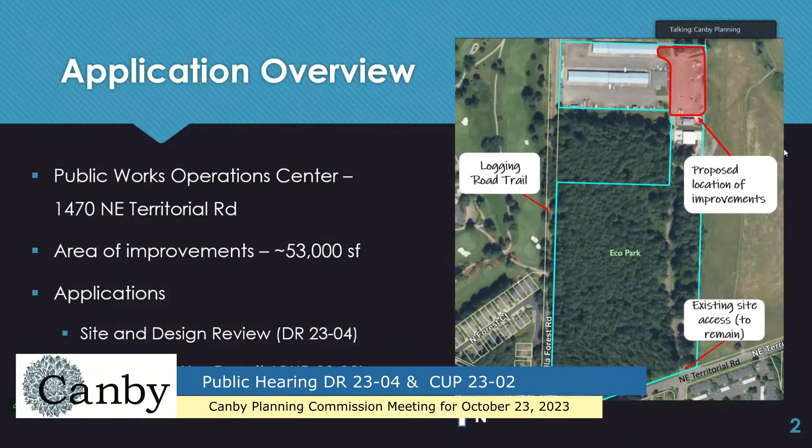So a brief overview of the site. The site is located at the existing Public Works Operations Center, which is located at 1470 Northeast Territorial. It is located directly north of the intersection of Territorial and Redwood, approximately 1,600 feet north of that intersection, so it's a fair ways north of the access to the site. It is a fairly large tax lot.

The tax lot also has Eco Park included in it, as you can see outlined here in blue on the map. The area of improvements are kind of covered by Judy's head at the moment, but up in the top right corner, sorry Judy, is a red area there, and it's basically just across the street from the Public Works office, if you have ever made it to the site. That area in red up there is the area of improvements that we're discussing for tonight, and that area is approximately 53,000 square feet.

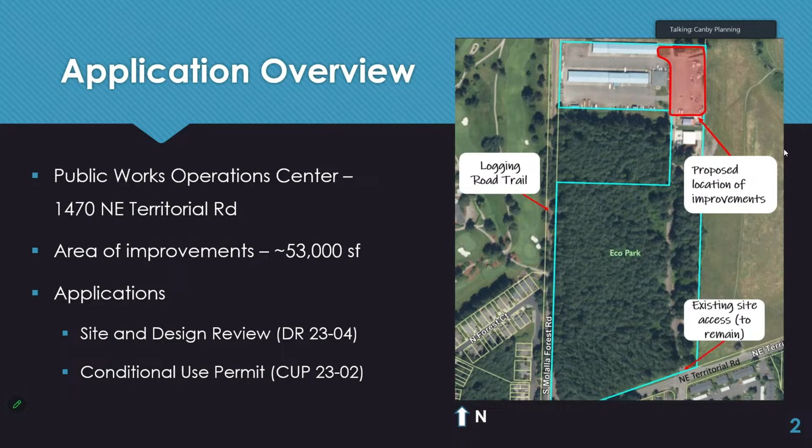As I mentioned, it is a site and design review because there are new structures being proposed on the site, so that triggers that application. And the use is a conditional use in the zone, and I'll get into that more in a minute.

So the zoning for the site is actually fairly unique. Given the use of the site, it is actually zoned R1 low-density residential. As some of you may know, we don't currently have a public facilities, pseudo-public zone in the city, so there's not necessarily a more appropriate zone at the moment, but the zoning certainly doesn't fit the use that is there right now. In the R1 zone, a major public facility, which we would consider this, is a facility that's serving a public use, and it is considered a conditional use in the zone, hence the CUP application.

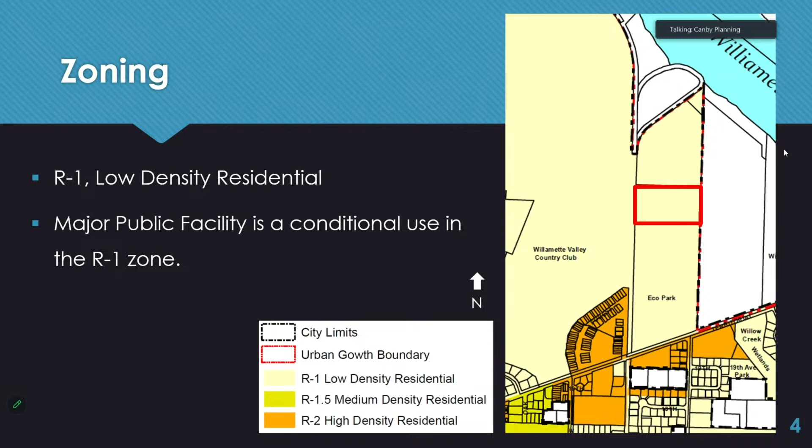And I also included the comprehensive plan map here because this paints a little bit of a better picture of what's going on for the uses at the site and both around the site. So as you see outlined in red, that is the site. The site is designated P public land use designation in the comprehensive plan.

To the south, you see Eco Park, which is a park. You see the Willamette Valley Country Club to the west and some undesignated outside city limits land to the east, and a little bit of high-density residential to the south of the site.

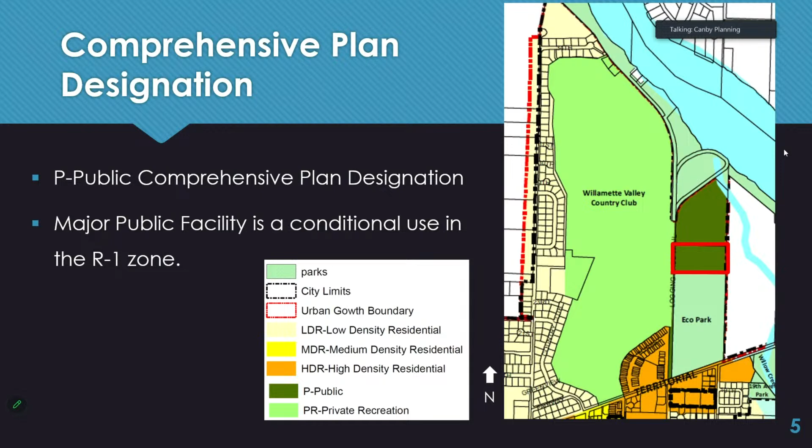So getting into the project, it is proposed to be completed in 2 phases. The first phase would be the fueling facility. This is the cardlock fuel station, and we'll also have a canopy with the fueling area. The fuel station is exclusively limited for use by Public Works, Canby Area Transit, Police, Fire, and Canby Utility. Public use of the station will not be permitted. In addition to the fueling area, there will be separately 3 storage fuel tanks on the site that will be added as part of this project.

And the second piece is parking improvements. They're proposed to formalize the existing parking area at the site and add some parking elements, which I will show you here.

So this is the site plan for the project. You can see here, phase 1 is both in the south—oh sorry, this is actually facing north. So on the east edge of the site, that darker shaded area is new pavement that will be added to extend the paved area that's existing, out to that fuel area, station area. And then you can also see directly north of the Public Works office is the 3 storage tanks that are proposed.

And then for phase 2, this is the upgraded parking area that's proposed. Currently the parking area is not paved and is unstriped entirely, so this would be a big upgrade from that. It would be adding 34 parking spaces to the site, or striping for those 34 spaces. It would be adding landscape islands and buffer landscaping around the parking area. It would be adding ADA spaces, and it would also be adding a pedestrian marked walkway between the parking to the office.

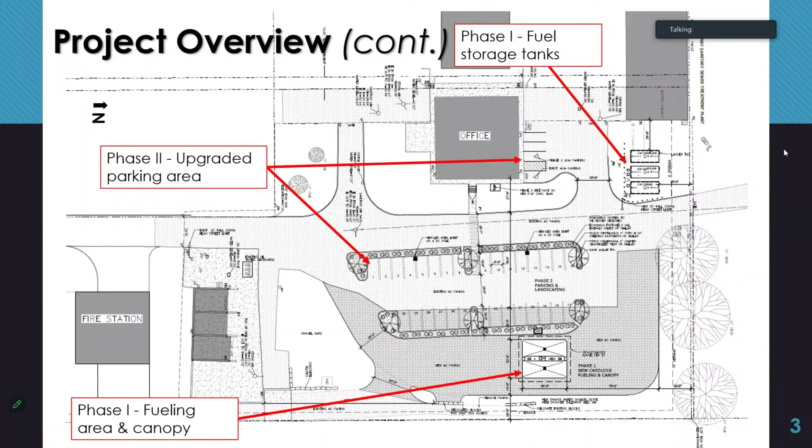So for the site and design review criteria, the LID and the site and design matrices were reviewed and are met, with the exception that phase 1 is 1 point short. In the staff report, you'll notice that the matrices are broken up into phases, so that phase 1 is by itself, and phase 2 is the combination of both. Staff believe this is sufficient because if you look at the limited scope of the improvements, and what points are available to make up, it doesn't really make sense for what's proposed at this site. It will be temporary, as this is the phase 1 improvements, and phase 2 does exceed the minimum requirements for the site design matrices and the LID points.

The building design and use is compatible with neighboring structures. Most of the neighboring structures out there are kind of secluded to the Public Works, wastewater treatment, and the new fire station out there. All are very utilitarian design, designed for their intended use. The canopy will be white, which is fairly similar to the coloring of the other buildings on the Public Works Operations Center site.

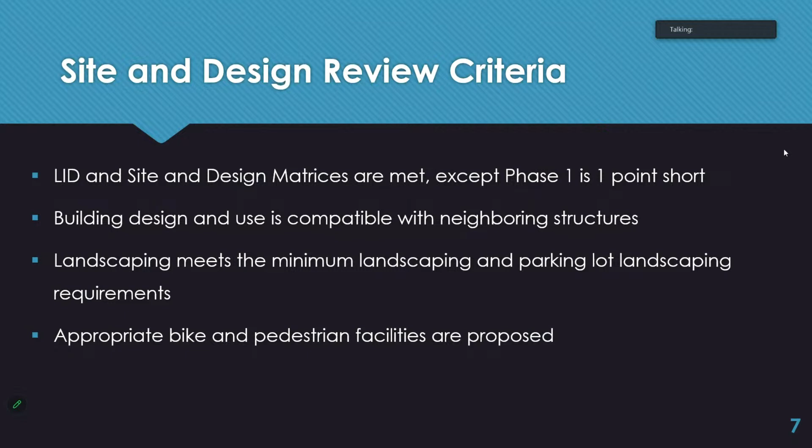And so we also have the CUP criteria as well. First, as reviewed in the staff report, it meets all of the development code regulations, as well as applicable comp plan policies. The comp plan really focuses on the adequate provision of the full range of public facilities and services in the city. So providing this city facility would help several of our service providers within both the city and partner agencies provide that full service and improve their service.

Additionally, the comp plan speaks to the compatibility of land uses in the city. When you look at the fact that this site has been used for a public works operations center, which this proposed use is just in addition to and fairly consistent with the existing use, you could make the argument that it is compatible with the surrounding uses. Neighboring residential is over 1,000 feet away, and there's fairly good buffering with Eco Park to the south, as well as the open space lot that is located to the east.

The public facilities are adequate, kind of obvious in this application, but it was reviewed and approved by the public facilities providers. And the facility will not alter the character of the surrounding areas. That's pretty similar to what I said before. It is kind of consistent with what is already happening on the site and will continue to do so.

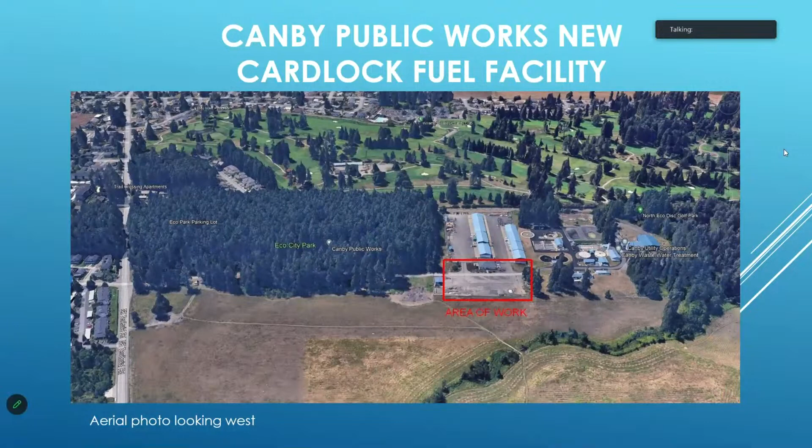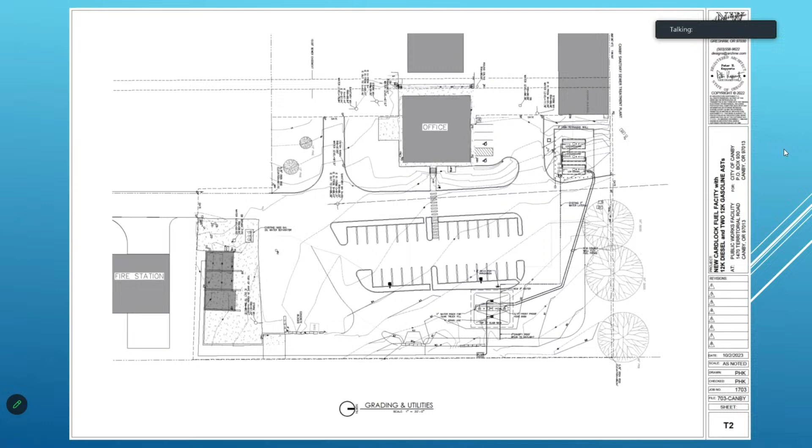Here is shown the catch basin drains going to the oil water separator, going to the pump and running up to these bays. And the existing 1,500-gallon oil water separator is there.

The fuel island, fairly straightforward, one gasoline dispenser able to fuel vehicles on either side. So we have 2 fueling positions for the gasoline dispenser, a card reader, a 4 to 500 gallon diesel exhaust fluid tank with dispenser on the island, and then a diesel dispenser for 2 fueling positions. One change, something I misunderstood, the water fill for the tank truck is not going to be overhead. It's just going to be a standpipe that comes up 3 feet off the ground with a connector.

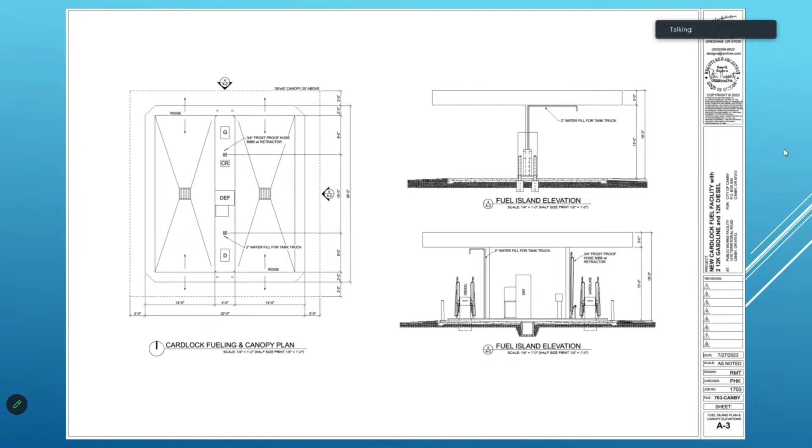The tanks themselves meet all code requirements for above-ground fuel facilities. The tanks are 2-hour fire rated. That means that in the event of a hydrocarbon pool fire, for 2 hours, the product inside the tank will not raise in temperature enough to reach the lower flammable limit. So if there were a pool fire, which is not possible here because there's no way to create a pool of hydrocarbon, it would run away or flow off.

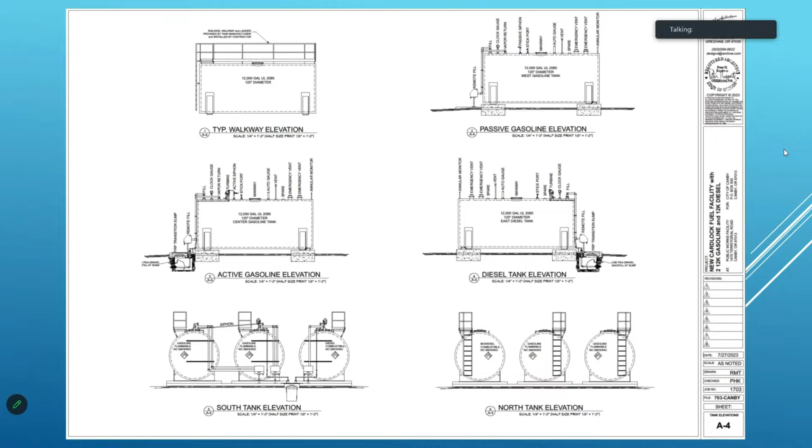So for 2 hours, the product inside the tank would be safe. The tanks are anchored to concrete footings, which are engineered for seismic events, so the tanks will not move in an earthquake, or at least not be damaged. I mean, they'll move with the earth. And they're also engineered for wind loading in the event of an empty tank subject to high winds. It won't roll over.

Next slide. So this is a typical above-ground tank installation. We have fill boxes for the fuel connection from the delivery truck. They contain up to 15 gallons of product. Should it be spilled, it will be contained within the fill boxes.

The above-ground piping transitions to underground piping through a sump that is accessible, and all the connections are accessible, and it has a leak sensor. So should there be any liquid in that sump, the sensor can determine whether it's water or petroleum product. If it's water, we get an alarm. If it's a petroleum product, we get an alarm and shut off. So it automatically shuts off if the sensor detects a fuel product in the sump.

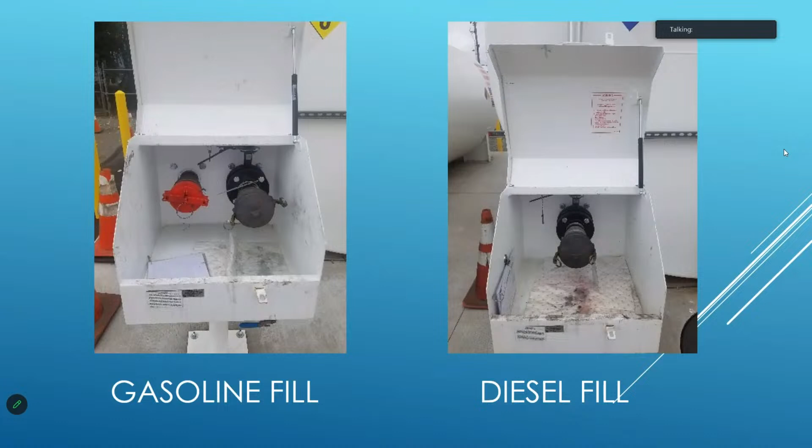Next. Here's a closer picture of the fill boxes. The one on the right, the diesel fill, is just a single connection. The one on the left has 2 connections. One is for product being pumped into the tank, and the second fitting with the red cap is vapor return. So for every gallon of gasoline put into the tank, a gallon of vapor is returned to the delivery truck. And that's the air pollution control system.

That was considered stage 1, back 30 years ago when they required that. Stage 2 is collecting vapor return from the vehicle when you're being fueled, where you have that elephant snout bellows around your fill pipe. That is not required at this site because we're significantly below the threshold volume of fuel. So we do not need stage 2 vapor return. Otherwise, we'd be running a second pipe all the way back to the tanks.

Next. Here's a typical top of the tank. This area here, that's the fill pipe coming in, so this is a diesel tank. This is a clock gauge, which is a manual float gauge, so if the electronics fail, you have a digital readout, a mechanical readout of the volume of fuel in the tank. This is the head of the turbine, which is a submersible pump that sits in the bottom of the tank and pushes the product out to the dispensers.

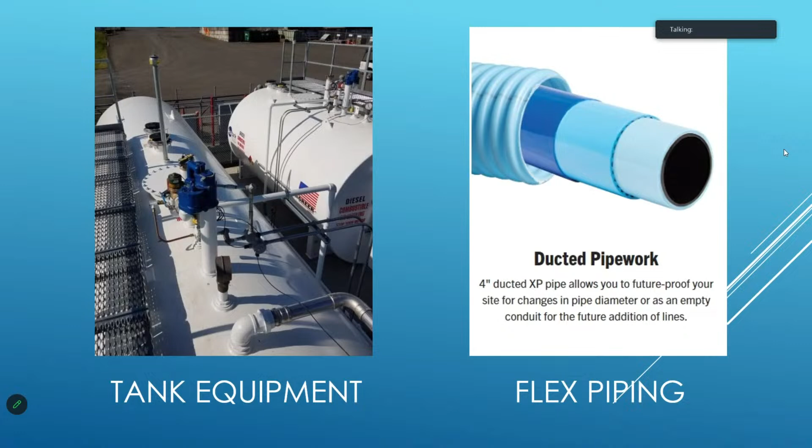So the transition sump at the tank is fairly straightforward. We do have a shutoff valve and a flexible fitting so that in a seismic event, if the tank should move differently than the ground, we won't have a pipe break in the product piping.

At the dispenser, this is a typical dispenser sump, although this one has gasoline, regular, super, and diesel. That's what these 3 shear valves are. And the shear valves provide protection if the dispenser is dislodged from its mounting. So they're double poppet shear valves, and the valve actually breaks apart, and each poppet is in the opposite halves of that valve. So if this dispenser were completely removed from the base, it would not drip diesel or gasoline out. Similarly, the pressurized piping coming in, that poppet would also close.

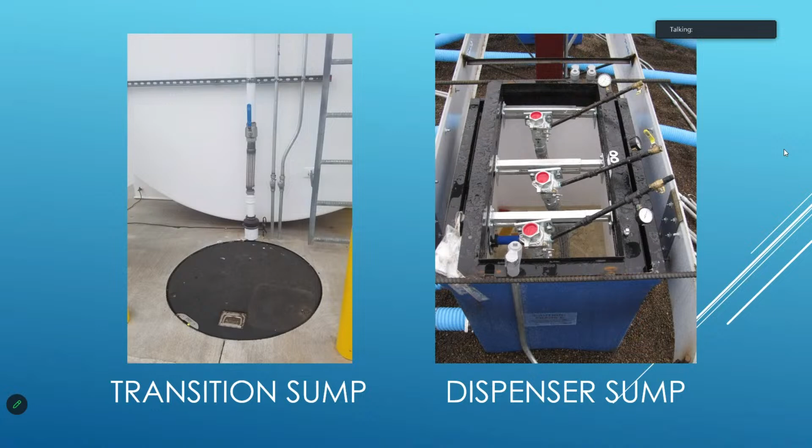That double poppet is also fitted with a fusible link. So in the event of a fire, the link would melt and the double poppets would close. So the Hollywood special effects you see are technically not possible, but it makes for good movies.

Any questions? So just real quick, from a security standpoint, I think that was something that folks were concerned about. These tanks are going to be kind of similar to what you'd see at a Carson or a Pacific Pride, where you have the above-ground tanks. They're typically on a pad. There's bollard posts protecting them, fencing around that most likely, and then piped to a fuel station 60, 80 feet away.

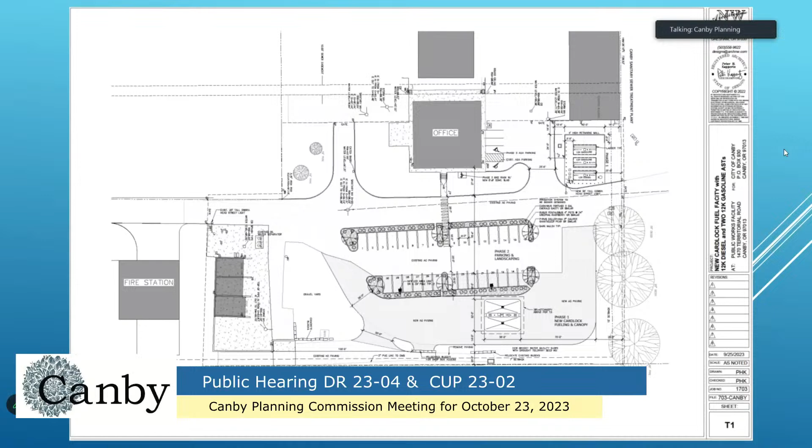The other thing, can we go back to the site plan map? One of the things I didn't see in this is travel. There's no arrows for travel of cars and so on. And I know you guys are really good at painting lines and arrows.

I'd like to see where your trucks are going to come in, and I'd be happy to point it out to you. Is it on here? No, I can point it out with my pen. I did not include the traffic turning circles because they get somewhat confusing.

But we've designed this to handle a 60-foot wheelbase vehicle, and the fire department has blessed the design, saying their vehicles can get in and out. This area is gravel; we're adding paving in here. I believe we are 25 feet wide, so the trucks would come in this direction.

It's one-way traffic. This is when they're filling up, right? When they're filling, yes, and then they would exit out like that. I figured they were either coming in one way or the other. No, I'd like to see some striping to get them going in the right direction, and the cars.

We can paint arrows here, but it's one-way traffic in, and we want to do counterclockwise circulation so that we minimize crossing traffic. The islands are moved to the north, so we have queuing space on the south side. So are you going to have the striping on the pavement?

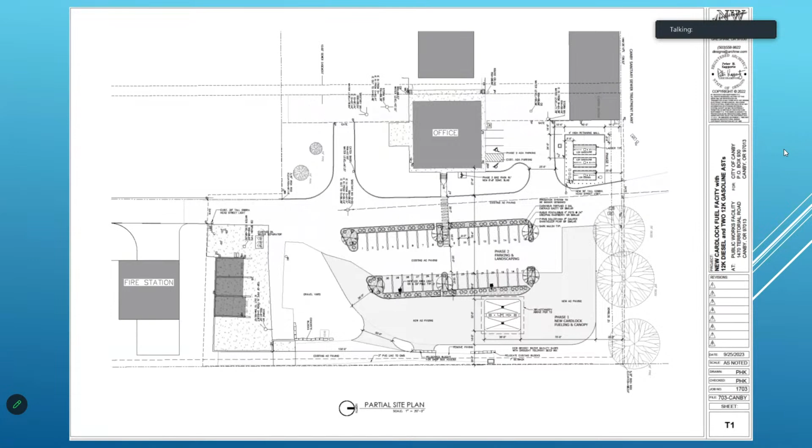The reason for that is the driveway up into the Public Works barns has a slope to it, and the trucks need to be near level to avoid retainage. So do we have enough room to do all that, Jerry?

Yeah, good. We talked about that with the wastewater plant, that's the only thing behind there, and there's minimal traffic in and out. It's just coming and going, and there would still be a lane open to get around them.

The nice thing about that too, sorry to interrupt, is the trucks - we actually decided, I think it was planning that recommended putting the tanks up there, and we benched the whole thing down. We're going to put a wall around it, so it's set low on a nice slab up there, kind of at grade level, with the top of the curb so it's nice and flat.

If you did have a spill or something, we thought you could contain it real good with piles of sand and stuff like that. It's easy to get to, it's out of the way - the truck's up there fueling and it doesn't affect the trucks coming in getting fuel and stuff.

That's something I forgot to point out in my presentation - we're adding a retaining wall here in order to get that level area. In the submittal package we did not have a retaining wall, so these things are actually going to set down just a little bit. We pushed them down as low as we could just to hide them, and we wouldn't need the wall - we could slope the grass.

It just, we thought it'd be easier for maintenance to put a wall in and then have a flat area for mowing the grass. I see that, I think that's wise.

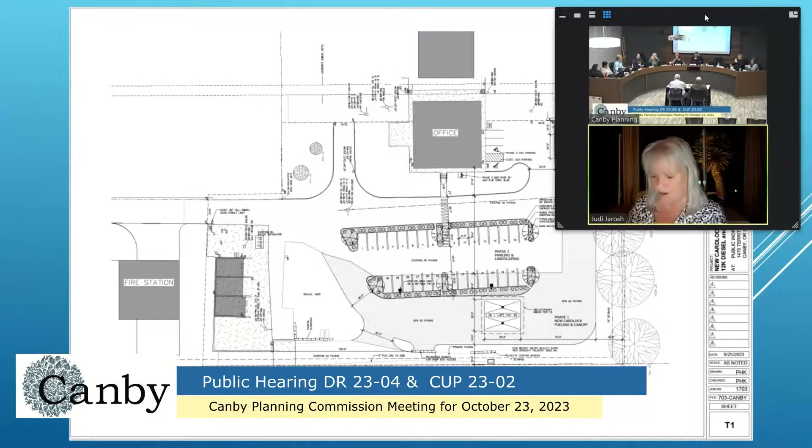I don't understand what that means. So in other words, we're going through the whole process, and then we're going to go through the process for the second hearing, correct, Don? Commissioner Jarosh, I think the answer is we'd like your comments and questions now, because there will be a hearing behind this, but now is the time to ask your questions. I just didn't know if Jerry had a separate presentation, so thanks.

My question is really a little bit about the traffic flow and the efficiency. I mean, this whole thing makes sense to me, and I certainly don't have any questions about the parking lot, but the report primarily said this is for efficiency's sake, which makes sense. I'm trying to understand, though, Jerry, maybe you can help me.

When I think about the public works vehicles that are there now that have to travel elsewhere to get fuel, that makes so much sense that of course it's more efficient that they can get a one-stop shop where they sit, they can be fueled up. But what I didn't quite understand was who else will in the future be coming there for fuel? Will the other fire stations come there? Will the police come there, and Canby Transit? I'm trying to understand the differences between the ins and the outs.

Right now, the fire and Canby Utility are on board with this. I think they will be fueling there just because of the congestion down at the Pacific Pride at the other end of town. The schools are over there, there's a lot of traffic, everyone else is fueling up there, school buses sometimes, everything else. So it's busy.

So I think they're still going to continue to have their Pacific Pride cards. If they're on that side of town, they would probably fuel over there, but if they're working on our side, they would get fuel with us. Transit is the only one at this point that hasn't decided if they're going to be fueling there. They're looking into it. I don't think it made sense for them, I think it was closer to go the other way. Todd Woods got everything down to the second with the buses on what's most efficient. So police would probably be the same, they would keep their pride cards, or if they're on this side of town, fuel here.

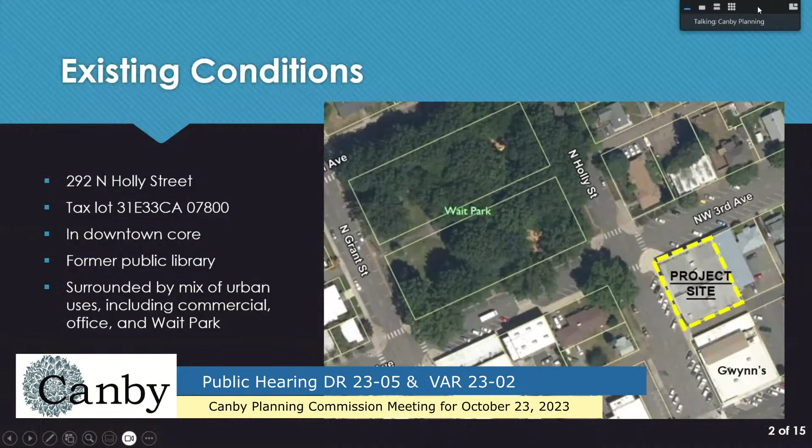Thank you, Chair Ellison, and members of the Planning Commission. Ryan Potter, Planning Manager. Tonight I will be presenting about the Canby Beer Library. This is related to applications DR 23-05, a design review application, and also variance application 23-02. The location of this project is in downtown Canby, right across from Wait Park, or diagonally from Wait Park. It's on Northwest 3rd and North Holly Street, in the downtown core. It's our former public library, so for many years this was the city's library, and we did sell it to the applicant team a couple years ago. It's been planned for an adaptive reuse for the last couple years, and it is surrounded by a mix of other urbanized land uses, including residential, commercial, office, and others.

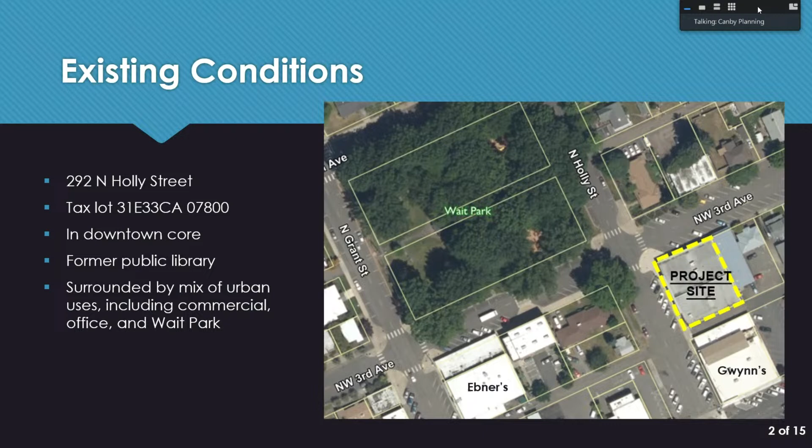Next, I'll talk about the zoning. It's in the C1 downtown commercial zone. You can see by the star on the screen, it's right in the middle of that red area. And then it's also in the overlay for our downtown zone, which has its own sets of guidelines and development standards.

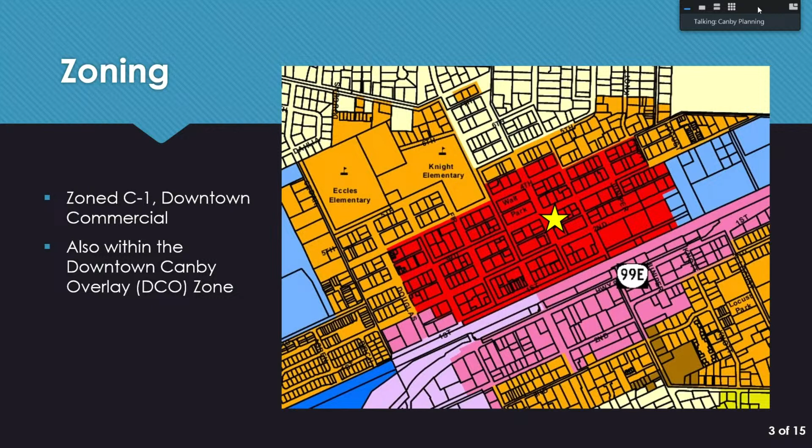So the proposed project is an adaptive reuse project of the former library, and it would turn it into a commercial project, including two major components. The first would be an indoor brew pub on the more southern piece of the site, and then the other half approximately would be a semi-enclosed food cart area.

That semi-open area would have a perimeter wall with screening that would limit access when the facility is closed. Both elements of the project would be accessed from Holly Street, and the building envelope overall would match the building envelope of the current former library.

There are two items for the design review that require a major variance. The first is floor area ratio, and the second is glazing requirements - the windows and doors that are along the public realm.

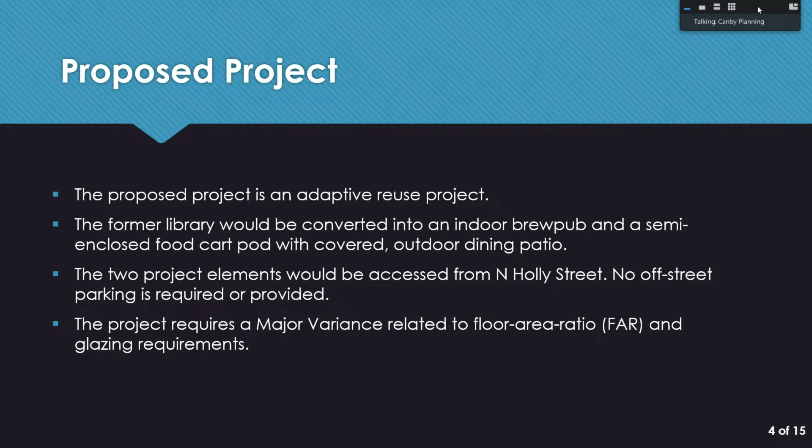I have a couple graphics here, but I'll let the applicant, after this - they have their own presentation, so they'll go into the details of the design. But overall, this is the design.

This is looking from above Wait Park, and you can see there's the outdoor area with the food carts. There's the middle portion that is a covered dining terrace, and then to the right on this graphic is the indoor brew pub.

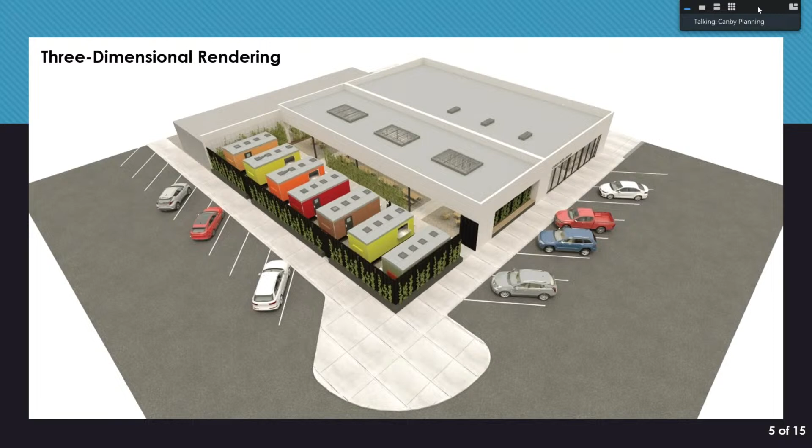So there's a number of criteria in the code that apply - all the usual suspects for design review. Like most things in downtown, both the C1 commercial zone and the overlay apply, and they have their own sets of overlapping guidelines and standards.

Also, we have a new part of our code that was just approved last year that addresses food cart pods, and obviously this project includes a food cart pod. The variance section is not one that you always see with design review, but it's included here.

As you saw in the staff report, we go through all the code criteria - I'm just highlighting the high points here. Restaurants, drinking places, bars, brew pubs, food carts - all of these are uses that are explicitly allowed in the C1 commercial zone, so there's no conflict there.

Parking - because it is in the commercial core, there's no off-street parking required. None is provided, consistent with that.

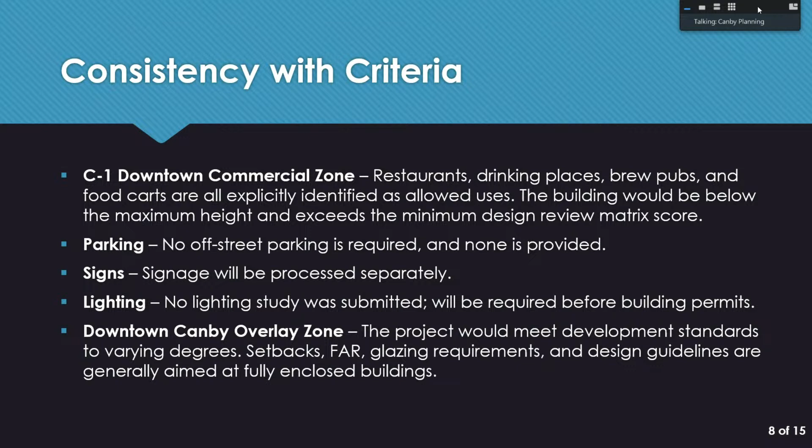As I said before, some of it's enclosed, some of it's not enclosed. So that's where the project inhabits this bit of gray area when it comes to complying with some of the code requirements. The main two of those that we'll go into are the two that require variances.

So the first of those is floor area ratio. Floor area ratio, which we call FAR, is really about the intensity of building that is allowed on a site.

You can see this diagram just gives an overview - this is just something I lifted from the internet, but basically the idea is if you have an FAR of 1, that means the whole site is covered with building if it's 1 story, but then if you get 2 stories, then you only need to cover half the site, and so on and so forth.

So it's really governing the amount of development, but not really having a bias on how much it covers of the site. You think of New York City where a lot of the building mass is - you can build a really tall building, but... maybe that's not a good example, I'm sorry. But you can see on the diagram, you can satisfy an FAR in multiple ways.

Most buildings, including the former library that's on this site right now, look like the bottom middle of this diagram, where you have an FAR of 1, which is a building that covers the entirety of the site with a single story building. The minimum FAR in this section of this zone is 0.8, so for most sites in downtown Canby, you have to have a building that covers 80% of the project site.

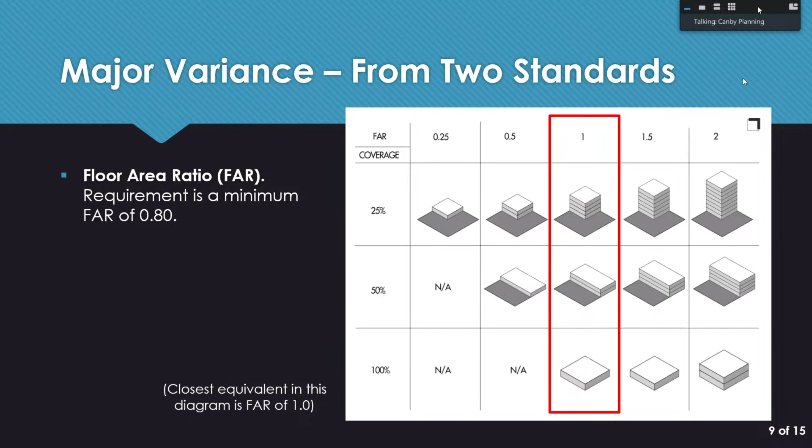So as shown in the applicant materials, they've attempted to get closer to this 0.80 FAR by utilizing pieces of the roof that create more roof coverage over the site, getting closer to 0.8. If you add the enclosed interior portion of the building with the portion that has a roof canopy, it gets to 74%, which is a lot closer than just the 44% that's the interior piece.

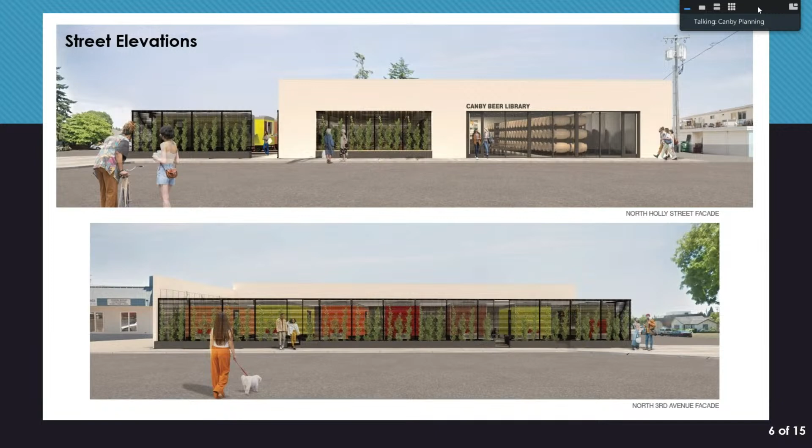The second item needing a major variance is also related to the uniqueness of this project that's partially enclosed and partially non-enclosed: the glazing requirement. Like a lot of downtown development standards in any community, we have glazing requirements that are really meant to add transparency and liveliness to a downtown, so when you walk down the street you're not just walking by blank walls—you're walking by windows and doors and things you can see inside, creating more visibility. That's where these requirements came from.

In this part of the downtown core, 60% of a primary facade is supposed to have glazing—transparent windows, whether that's doors, sliding glass doors, or windows. On secondary facades, it's 50%. And this third one is one that planning staff have always objected to a little bit: we also require 50% to be glazing on alley-facing facades. I think some of the controversy is that there's a lot of alleys where there's really no reason to be looking onto the alley, so I can definitely see us changing this particular criteria in the future.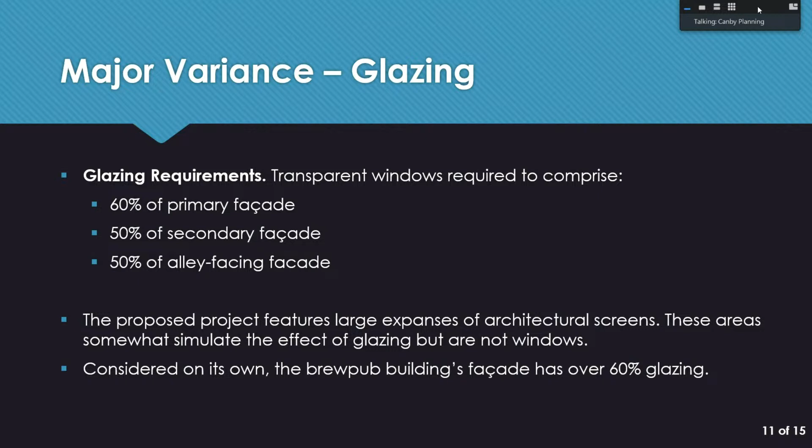But as of right now, the primary facade needs 60%—that would be on Holly—and the secondary and alley-facing facades would need 50%. Obviously, if you look at the renderings, the project doesn't directly achieve that to the letter. But if you consider the brew pub, the part of the project that's actually enclosed, it does meet the 60% on its own. That's another way the applicant team has tried to get closer to meeting that requirement, by creating a building that actually does achieve it, while the non-standard, atypical piece of the project—the food cart pod—attempts to meet it by partially enclosing it and having cut-out screened areas that mimic the cadence of windows.

So when the Planning Commission considers these variances, there are 6 criteria in the code you're supposed to consider—I've paraphrased them here since they're longer in the code. First, are there exceptional or extraordinary circumstances? Is the variance needed to maintain the same property rights as someone else in an equivalent site or zone? Would there be a conflict with the comp plan or municipal code? Would there be adverse impacts to the surrounding vicinity? Is the variance the minimum needed to alleviate the hardship? And lastly, are the unique or exceptional conditions that can't comply with the code caused by the applicant?

The staff report did go through planning staff's interpretation of how the project does or does not comply with these 6 code criteria for a major variance. Ultimately, our recommendation was that there was enough support to grant the project a variance, but as you probably noticed in the analysis, we did defer to the Planning Commission to make their own conclusions.

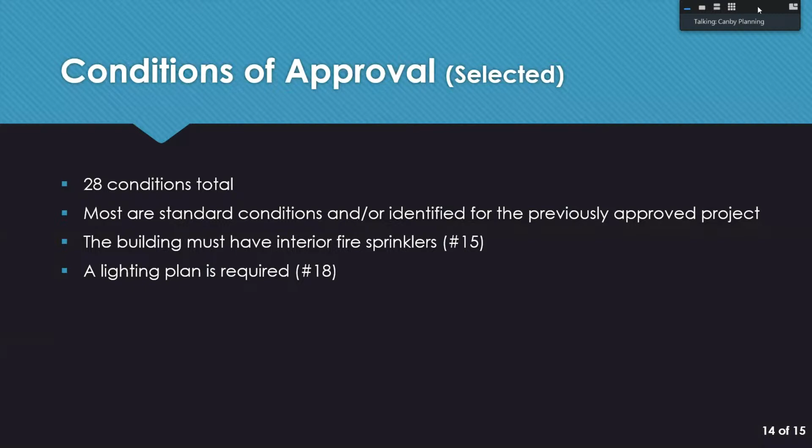Based on the analysis and conclusions in the staff report, planning staff recommend that the Planning Commission approve both the design review application 23-05 and variance application 23-02.

Thank you, Mr. Potter. Before we get to the applicant, are there any questions for staff from the Planning Commission?

I have one about the east elevation. I'm looking at that and noticing there is very little space between, what is it, Minuteman Press and that building—like a few feet. Can a person even get back in there? I kind of didn't think so. So I'm thinking about glazing requirements specifically in that case, and also facing the alley, I don't have any problem varying with that, I don't think. Do you even consider that part of the building that's obscured by the next building as part of the glazing requirements, that square footage of the facade?

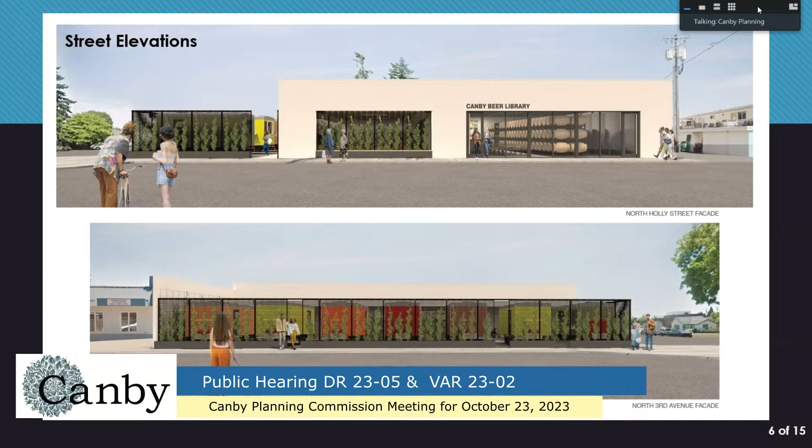You mean the northeastern facing facade? Yeah, that's it. It faces the reprographics company, right? No—the variance is for the facade shown on the bottom, which is more facing Waite Park, and also the Holly Street elevation, which, as you can see, has three components. The rightmost component does have glazing, but the other two have metal louvered screens instead of glazing.

Thank you. Just for clarification, when you say glazing, do you mean like the tint on the windows, like at the Dahlia building? Glazing just means a transparent material that you can see through into the interior of a building. Okay, and usually that's glass.

You said the utilities have already been discussed multiple times, but I wasn't there for it. So I was just kind of curious, is there gas service just for the pods specifically, just one line, or are they being fed individually?

I will defer to the applicant when they present to answer that, but one thing I was going to mention in my presentation, and I kind of glossed over it, was the fulfillment of the food cart pod criteria. This project is actually really uniquely great at fulfilling those criteria because it is being integrated into a building where the utilities can be run underneath. You see a lot of food cart pods where things are being run over the ground and having all kinds of things that need to be screened. This is unique in that it's being planned this way from the ground up, so a lot of the utilities will be hidden underground. But Bryce from the applicant team will definitely be able to speak to that better than I can.

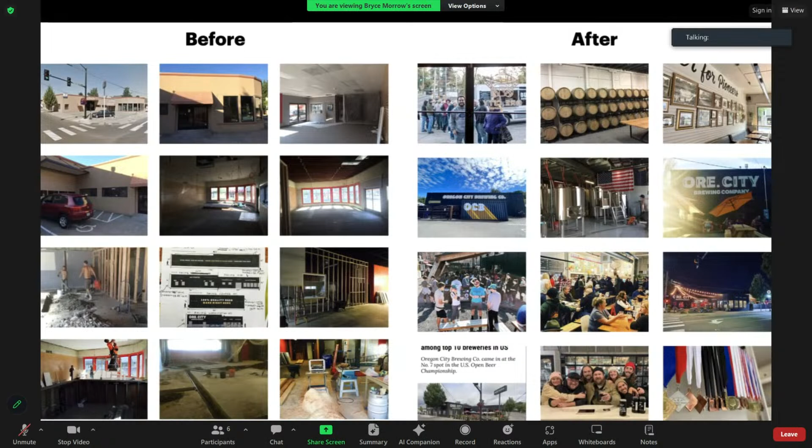Then when we decided to actually move into a legitimate facility, we got into this building, which is in downtown Oregon City at 1401 Washington Street in the north end of Oregon City. And we opened, let's see, it'll be 9 years here next month that we've been in business.

In a lot of ways, it was an adaptive reuse project. The building was a site built as Stout Motor Company, and it was a Chrysler Imperial dealership. You can kind of see the architecture where you can see the gas station in the front there, upper left-hand corner, and you can see that it was a showroom. Over time, there hasn't been 1 square inch of this property that we haven't touched. We've fully renovated every single bit of it.

The thing that has been most rewarding out of the project over the past 9 years has really been the impact on the neighborhood and the community. And I say that as I'm born and raised in Oregon City. I graduated from Oregon City High School. I used to work in the paper mill, Blue Heron paper mill. And growing up in Oregon City, there was a lot of vacancy on Main Street, boarded up. It's been a complete 180 over time, and it's so rewarding to know that we've had a part in that. It's been a real transformative experience. It's not just us, but it's a real food and beverage destination.

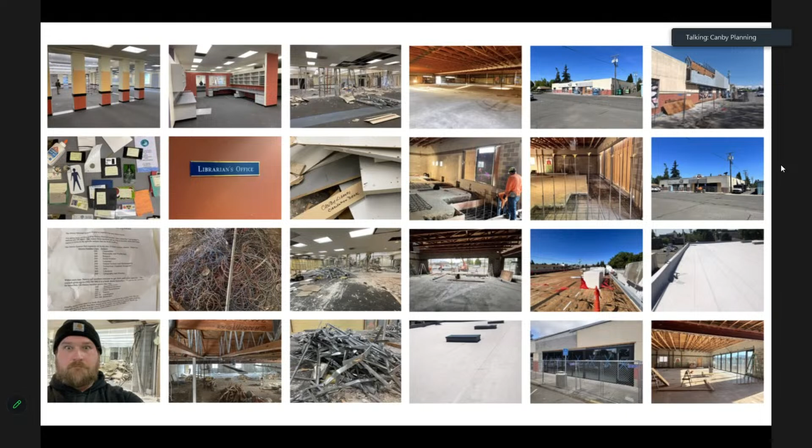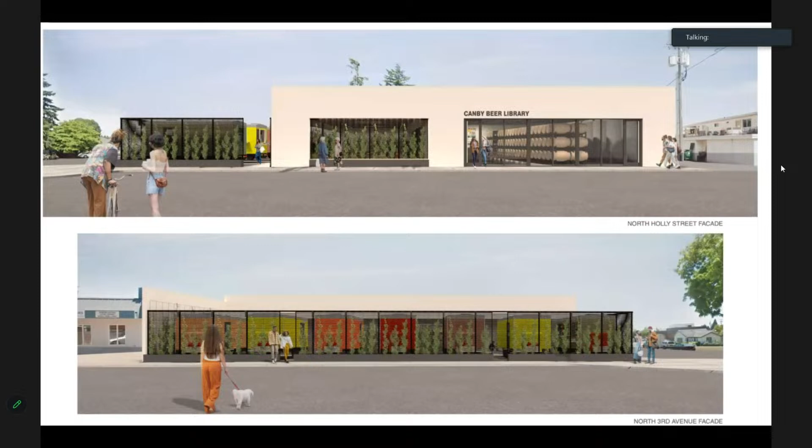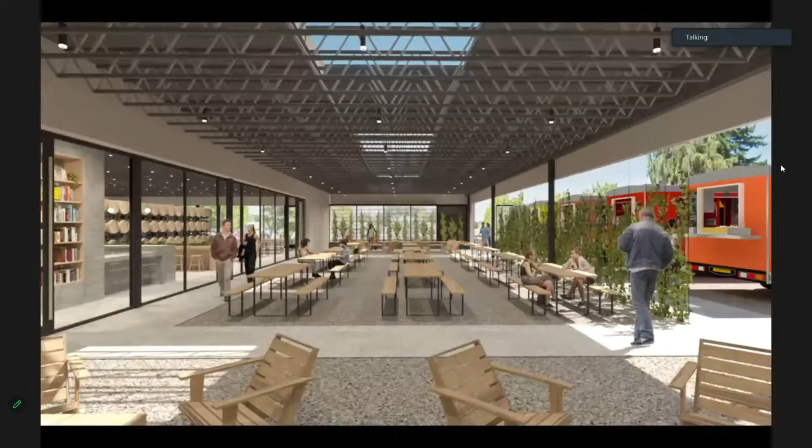Looking out, this would be a rendering from the backside of the canopy area. You can see the expanse of glass that connects the interior and exterior portions of the property. Those are actually sliders, so you can open up 40+ feet of the wall during warm season for a nice inside-outside feel. There'll be radiant gas heaters, just like we have in Oregon City, on the roof, so it'll be truly 4-season friendly. There'll be 3 oversized skylights in here to allow a lot of natural light.

We have a little homage on the far left-hand side, a little library piece with books, et cetera. You can see visuals of how the architectural screening would be looking out here. If I was in the far back end of the patio, that would be almost like the Minuteman Press right behind me. I would be looking forward toward Holly Street, and you can see how the transparency, just like glazing, would be.

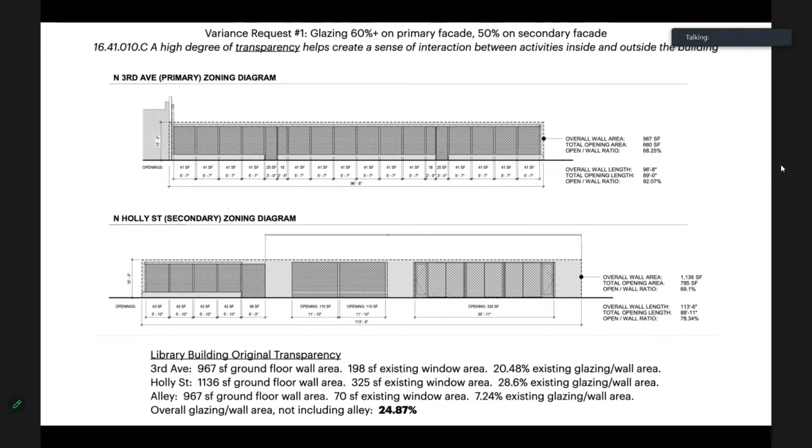Variance request number 2 is the floor area ratio, or FAR coverage, which is required to be 80%.

In the municipal code, the purpose of the downtown Canby overlay zone is to encourage more intense development in the core commercial area. That is done through the FAR, or floor area ratio. It's all about density. Floor area ratio means a method of calculating structural massing on a lot.

I believe it is, once again, semantics. We will be activating effectively 100% of this lot. If I had a 10,000 square foot parking lot, or let's just say bare dirt, I could put an 8,000 square foot building, and then I would have 2,000 square feet, and it could be a park, it could be open space, it could be parking, most likely, is what would happen.

This space will be 100% utilized. We will have 8 businesses that will be in here that are independently owned and operated. It'll be a thriving place with a lot of customers coming and going, and it'll be home to 30+ employees.

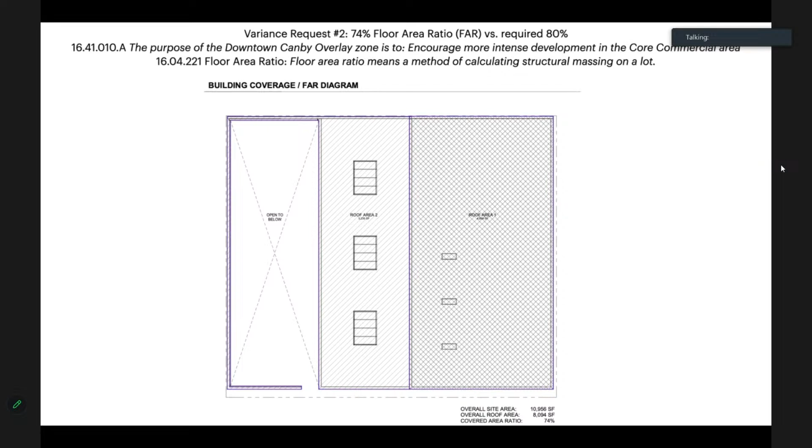So the roof structure, and Ryan eloquently went over this in his report, it is 74%. And I didn't just come up with, hey, let's make it 74, not 73%. That is structurally what the building is. So the use of it is difficult where this property is, difficult to retrofit for the permitted use of the food cart pod. So we try to really come up with a thoughtful solution to accomplish that.

One key piece at the very beginning of why this body even exists, why there's a design review process, I love this part, is the purpose and objectives of site development requirements and the design review process are to encourage originality, flexibility, and innovation. That's what this is. They put this in here before the standards of the 5 or 6 criteria that I'm going to go over on the next page, because you're not going to get it all right. You're not going to be able to see 50, 60 years out and nail it every single time. I love the second piece also, discourage monotonous, unsightly, dreary, and inharmonious development.

Okay, the other piece that is, and Ryan went over this just real briefly, the standards and criteria, those 6 pieces. I believe the authorization is just as important, which is the commission may authorize variances from the requirements of this title where it can be shown that owing to special and unusual circumstances related to a specific piece of property, the literal interpretation of the regulations would cause an undue or unnecessary hardship.

The number one thing is I'm trying to reuse a building. And it's not just any building. It's the former library building that served the community for 26 years. If I was just building a new construction building, it would be lickety-split. I wouldn't be asking for variances.

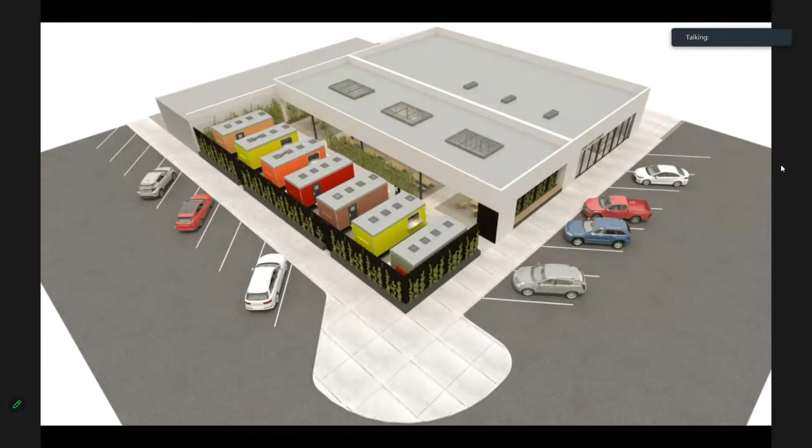That's all I've got. I'd welcome any questions. Thank you for the opportunity.

Thank you, Bryce. That was a fantastic presentation. Appreciate all the heart and soul you put into that. I definitely can feel how much this means to you. I think what we'll do, well, if we follow it to the letter here...

We have 3 minutes for questions before we move on for the applicant? I have a quick one.

I was driving by your Oregon City facility one time when you were craning a food cart out. Looked like it was kind of tight in there. Is that going to be how the carts come in and out of here, or are some of these panels hinged? Yes, it will be. We've had great experiences with the crane operators. We didn't do that initially, I can tell you, because I put them in there myself with a front loader attachment, and you could just picture endless K-turns moving it into this confined space. The crane has been just terrific, and it's easier on the food cart itself, on wear and tear.

And these are permanent tenants. They'll be on 1-year leases, but if my existing property is any indicator, they're going to be there for multiple years to come. So these carts don't move at all.

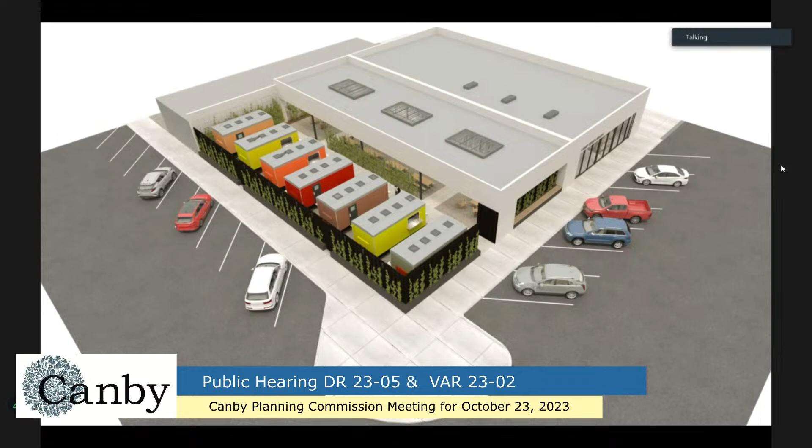And one question you had, Commissioner Driscoll, was about the utilities. So there will be extensive pock marking of the existing slab that is there. Some lessons learned with my other project—we had propane tanks in Oregon City. This project will have natural gas, so the meter banks will be interior toward the back of the property.

They will be individually metered for each cart, and then they will have direct hardwired internet connection, water, and a direct to sewer connection that goes to a grease trap. Trying to think through all the things before we cover them up with concrete. So learning a couple lessons over what I've done before, and we get a chance to start fresh with this project.

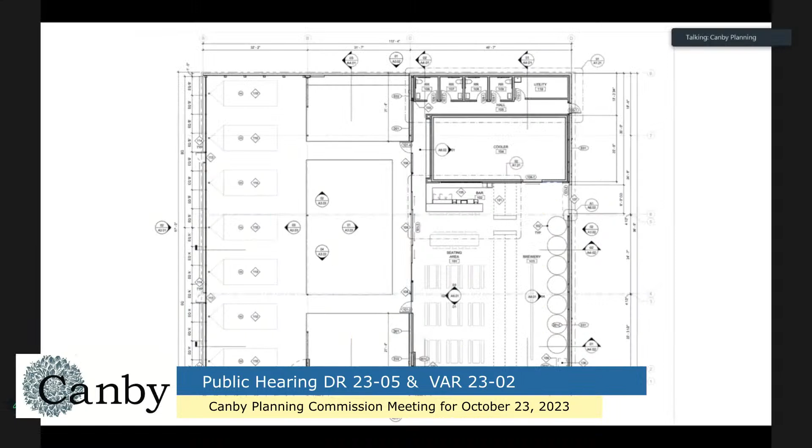If I could show you a rendering of the plan for it - we have to actually have forklift access to bring in material. If you can see, the overhead door is item 107 on there. I have a pointer. Let me see, it's roughly here - right here, this is the overhead door.

It is approximately 60 feet back, and the overhead door - the idea is this would roll up, it would be extra tall so we could have forklift access to remove material. This is going to be very convenient for us because we'd be loading in, most of the time, kegs of beer or product directly in the cooler from our other facility, or bringing in raw materials. So it'll be back from the street far enough.

The plan is to have the garbage receptacles approximately 83 feet back from Holly Street, including cardboard recycling. It would probably be a 4 cubic yard trash, and there would be a separate man door back here. Part of this is ease of use, but it'll also have panic hardware in the back for the event someone was in here and a fire alarm went off, so they'd have a path of egress. But yes, to answer your question, this is the plan, to have it right here.

Structurally, this is where an existing window is, so it makes sense - this is a concrete block building, and it's very tricky to just willy-nilly put an opening anywhere. Boy, you don't really want that - this is unreinforced also. So we're trying to put it right here, that would be the ideal spot.

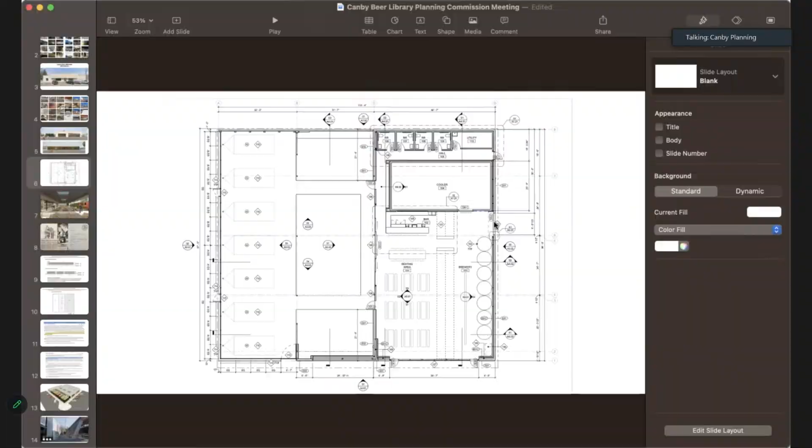Okay, that's fine, I just want to make sure it gets in there. Yeah, we're not parking out in the street and going through the front doors or through our other places - trying to work smarter here. Kind of, yeah, keep it in the alley.

Now, you said these food carts are going to be privately owned. The only reason I ask is when I saw this, I just got back from a trip in Florida, and a guy had something similar to this, but the owner of the facility owned all the carts, so he was renting them out. When I saw this, it didn't look to me like those carts could get out of there, so I thought, okay, he's doing the same thing - but you're doing the crane thing, so that works.

No, I don't like to have a captive tenant. I actually talked to him, and it was working for him, but anyway, I like this plan better. As far as the glazing is concerned - I'll date myself just a little bit.

When we implemented this whole glazing thing for downtown, we were running into buildings like the library that were just concrete wall things that we thought were really ugly, and we didn't want that to happen again. That was one of the reasons why we did this, so we didn't perpetuate that with other buildings downtown. It's a lot cheaper just to put up a blank wall, but they're really ugly for your downtown. So that's why we did this.

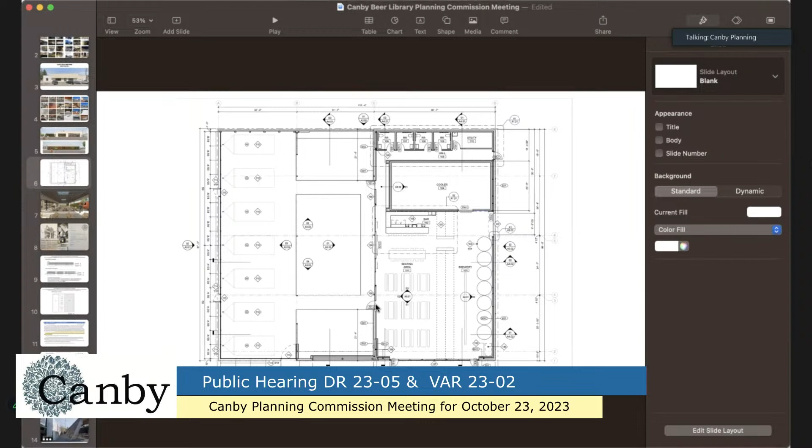Cool, thank you very much. Yeah, you're welcome. Thank you. Anybody else before we move on? Okay.

At this point, we would like to open the discussion up for any proponents. You have 3 minutes. Do we have any proponents of the project? Not seeing any on the interwebs, not seeing any in the crowd. Do we have any opponents? Nothing on the internet and nothing in the crowd. Very well, no rebuttal then.

So at this point, we will close the public hearing and open deliberations amongst the Planning Commission. Thoughts, starting at this end.

Commissioner Ellison: feeling great about it, no issue. Commissioner Hutchinson: seems great to me. Commissioner Llewellyn: it looks great to me, great job. Commissioner Jarosh: it's great use of that ugly building. And Commissioner Driscoll: yeah, I'm interested to see the cranes bringing the first pods in. It's awesome.

Okay, then I think we need to entertain a motion for, let's see, let me grab my project here, for DR 23-05 and VAR 23-02, referencing the Canby Beer Library Modified Project. I move we accept DR 2305 and VAR 2302 as stated. I second. Okay, we have a second.